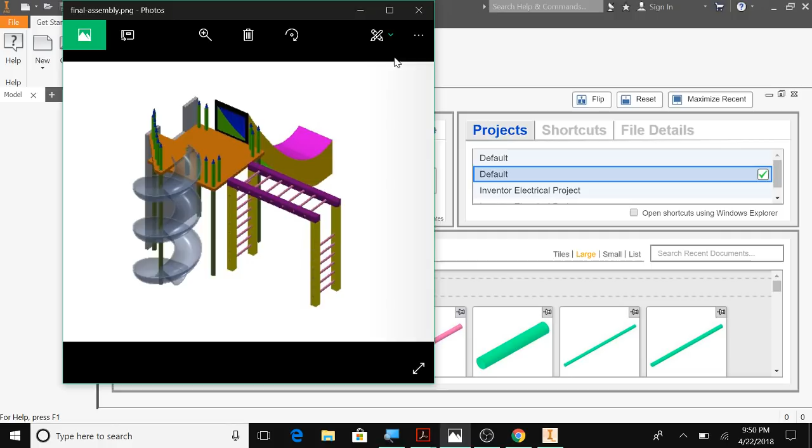So this yellow structure along with the purple structure there, and we are going to start off by creating a part, and we'll go File, Save As. This is going to be in our playground folder under bars this time, and the first one that I'm going to create is the upright monkey ladder. So I'm going to name it that, the upright monkey ladder. Save. Go to Start Sketch, XY plane.

Really important. I just grabbed that using the scroll button on my mouse, pushing it over to here. I use rectangle, and I'm going to start by creating this basic shape, which is 90 inches long and 6 inches wide. Remember, if you want to use the pieces of paper in the packet, they're up by the projector. Otherwise, you are watching this. So I'm going to start at 0, 0, type 6.0, and then 96. Escape.

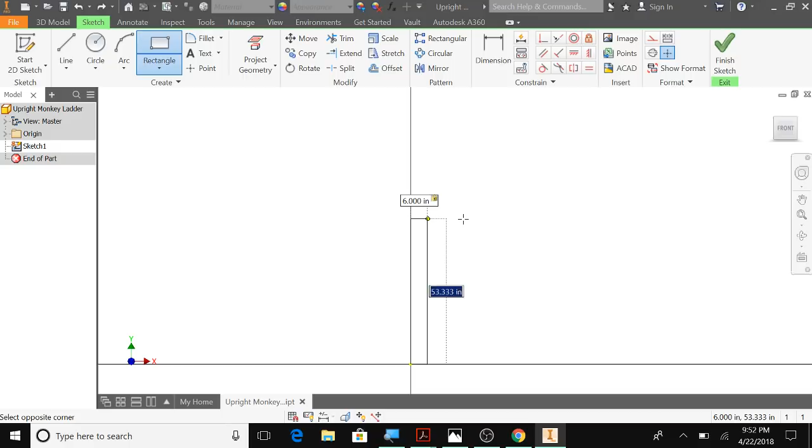Enter. And front. So I guess I failed to say this, but the way that I switched from 6 to 96 is I hit tab on the keyboard. That allows me to switch between each of those measurements. In case you didn't get that, I'll go back really quick and show you: rectangle 0, 0, 6.0, tab on my keyboard gets me to 96.0. And the reason it looked like it was disappearing off my screen is because I was so zoomed in.

That's the default, 1, 1, 1, 1, 1 on the XY coordinate plane. Now we're like close to 100, like what's that, 130, 110, and 10. So a little bit different. That's why it looks different.

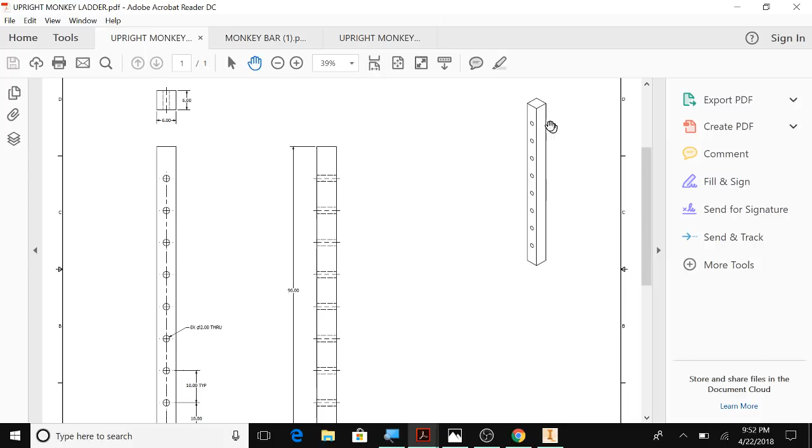So I'm going to hit Finish Sketch. The thickness of this is also 6 because it's 6 by 6. It's referring to that. So I did the width already, and the thickness or the extrusion will be 6. So extrude to 6.0

and home. Now this is why it was important that I created this in quadrant 1. So if you did any other quadrant or didn't create it vertically like I did, this next part's not going to make sense. You should probably go back and change it by editing your sketch. Okay, so make sure it's the way that this is.

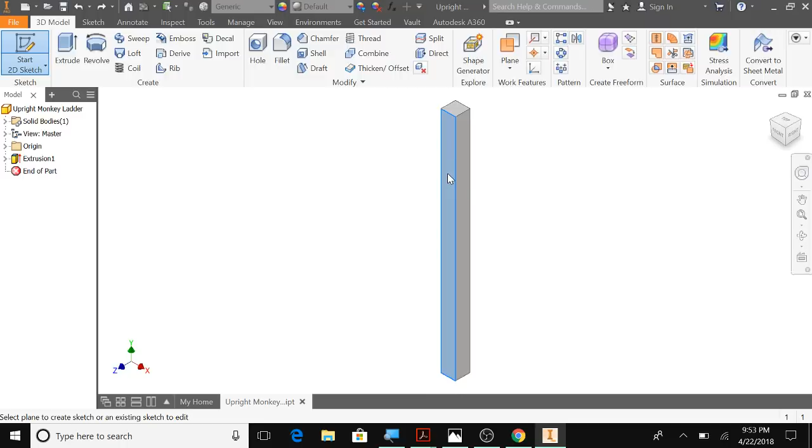Now I'm going to use a new sketch. Nope, that's not what I wanted. New sketch right here on the front, and I'm going to use point because what I'm doing is creating the holes. So these holes are every 10 inches and they're smack in the middle at 3 because that's half of 6.

So I'm going to put my cursor right here at 3, and then I'm going to let go of my mouse and just use my keyboard. So tab, tab, type in 10, and I'm just going to use the Y because it's already at 3. So 20, 30, tab tab 40, tab tab 50, tab tab 60, tab tab 70, tab tab 80, and I believe there's only 4, 5, 6, 7, 8.

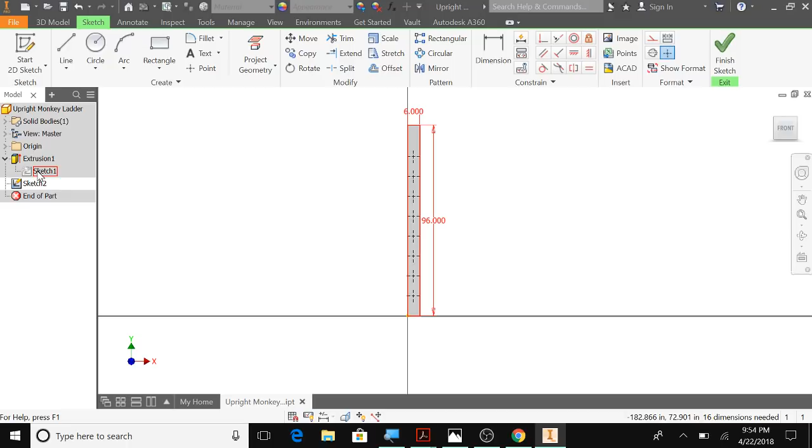I might have made that too long, let me check. I'm going to right click and finish this sketch, then go back to my original sketch. It said it was 90, right? 90. So right click, edit sketch, double click on this dimension line. If that dimension line isn't there, create it yourself. So 90.

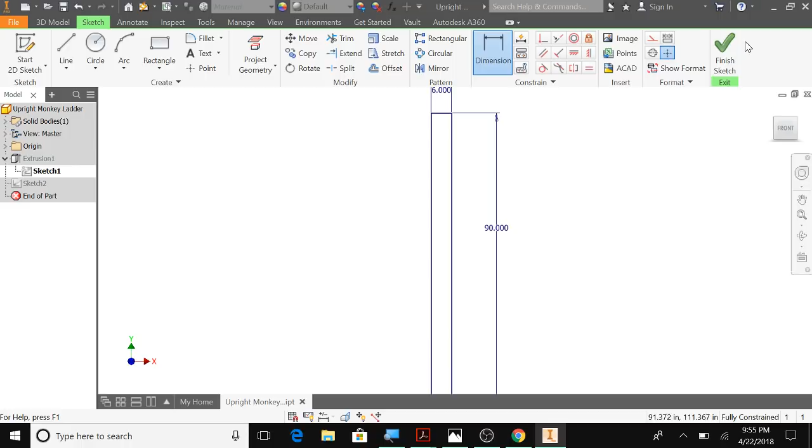Finish sketch, it'll shorten it. That makes a lot more sense. Then I'll create holes, and these need to go through all, with diameter 2.0, because our monkey poles are 2.0 in diameter. I'm going to click save. Just going to double check those go all the way through. Yes, they do.

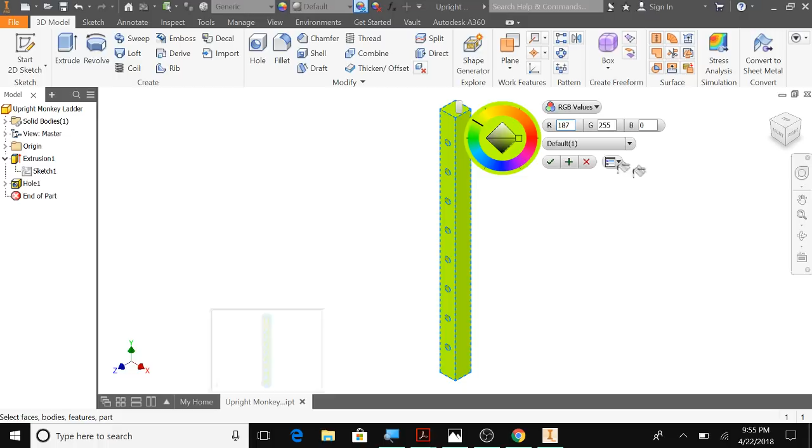And we'll make this similar to that image. We'll make these ones a separate monkey ladder, a little more yellow. Let's try 255, 255. Save. And then let's move on to the next one.

So new part, file, save as. This one's going to be monkey bar. Well, actually, let's stick with upright. Upright monkey bar. So upright monkey bar.

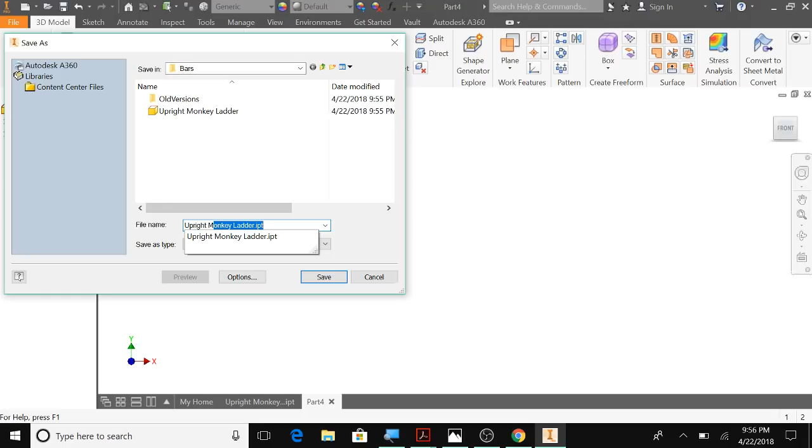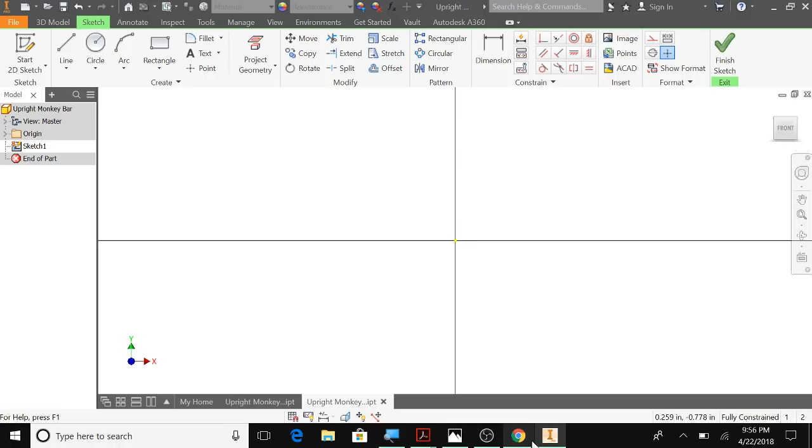Save. And this one has a little gap in it because on the image it's right here, so we're creating this one. I'm going to go back to Autodesk, create this, and this one is also 90 inches long. We'll try to get that right this time. 6 inches wide, so again on my XY plane, 6.0 tab, 90.

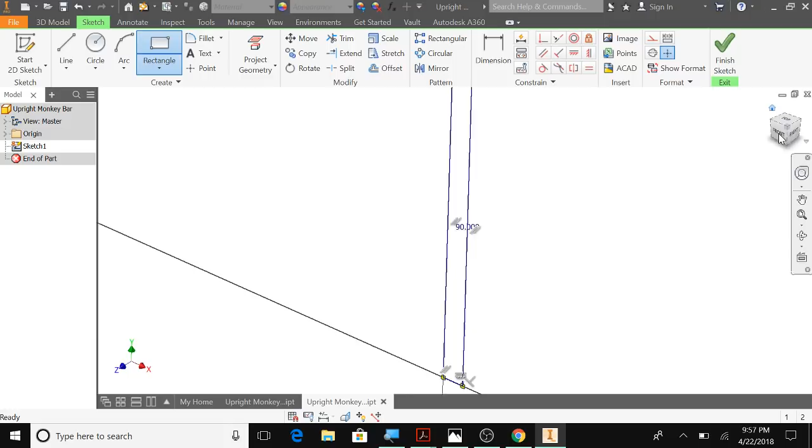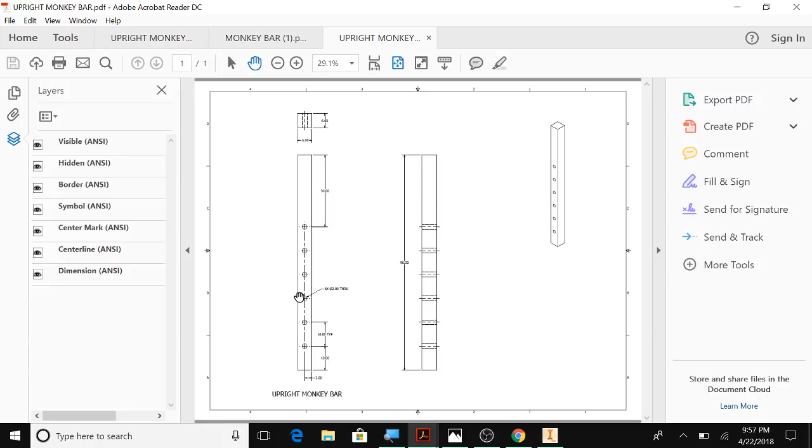Front, escape, and then we can finish. It's the same as the other one, so this one's also going to be extruded 6 inches, and then I believe the holes go up 10, because they have to line up. And there's this 30-inch gap here, so that's only 1, 2, 3, 4, 5, 6 of them.

So I'll start a new sketch on the front. Point, just go there, let go of my mouse. 10, 20, 30, 40, 50 - I think it was only 5. 1, 2, 3, 4, 5, 6. One more, so point 3, and 60.

Also make sure, sometimes you'll notice if you typed the coordinates in incorrectly, maybe you typed 89 on accident - see how it shows up way up there? It'll create a hole there when you finish the sketch, so make sure you right click on these and delete them.

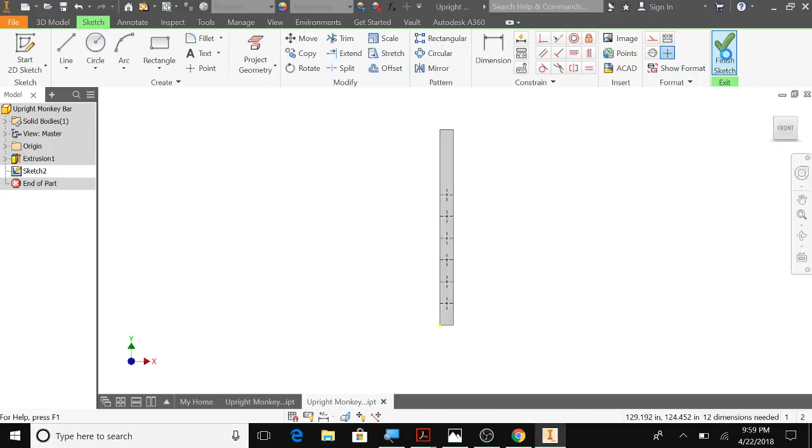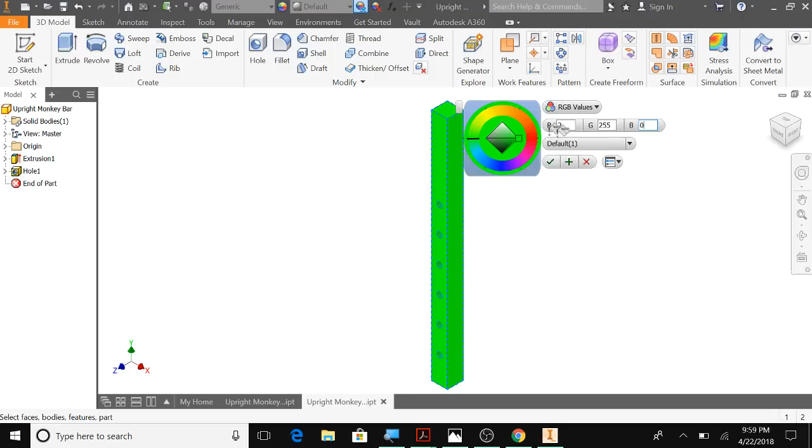So finish, hole, and through all, 2.0, enter, color here. So we'll hit save.

And final one, so new part, and this is monkey bar. Okay, this one's 96 inches long, 6 inches wide, and the holes are every 12 inches, and they're also 2.0 in diameter.

So start new sketch - and don't do that because we didn't save it, so I just did undo, file, new part, file, save as, monkey bar, save, new sketch, rectangle. This one is 6 inches wide, 96 inches long.

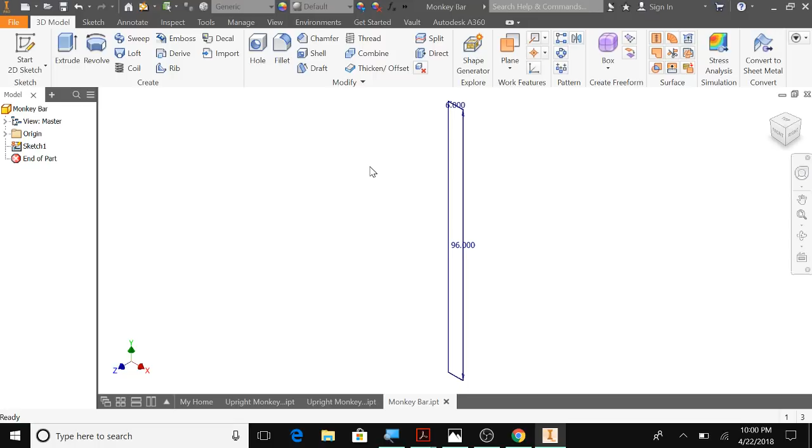48, 60, and it goes all the way up, right? So 1, 2, 3, 4, 7.

So, oops, 3.0, tab, yes, 72, and 96 - nope.

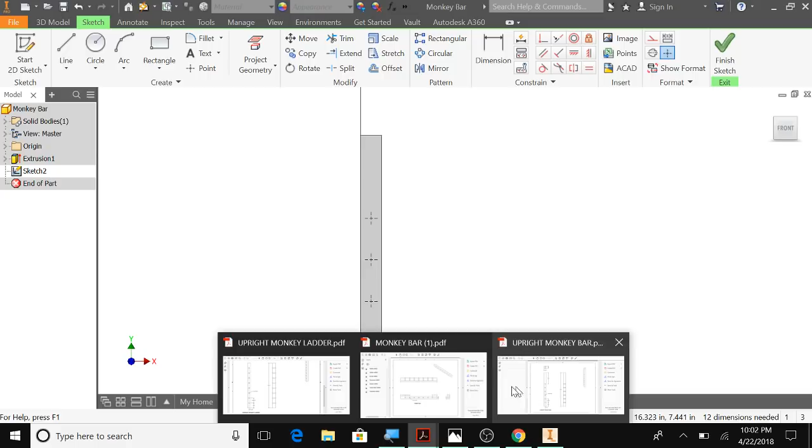Let's get rid of that one. 1, 2, 3, 4, 5, 6. And there's 7, I believe. 1, 2, 3, 4, 5, 6, 7. Seven times 12 is 84. So, okay.

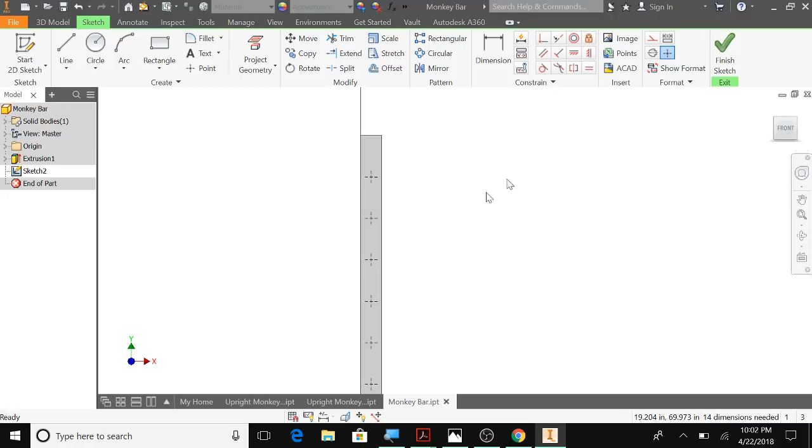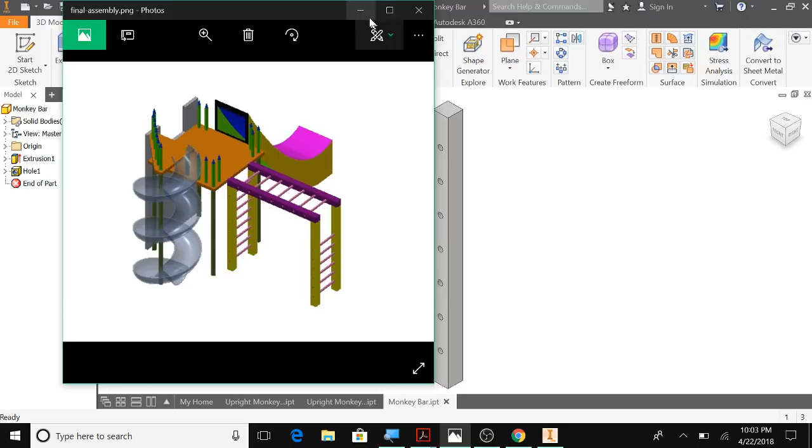And we will put holes 2.0 through all. And this one we can make a different color - I think on here it's like a purplish color, so I'm looking at this right here. So we can make it kind of a purple. Sure. Save.

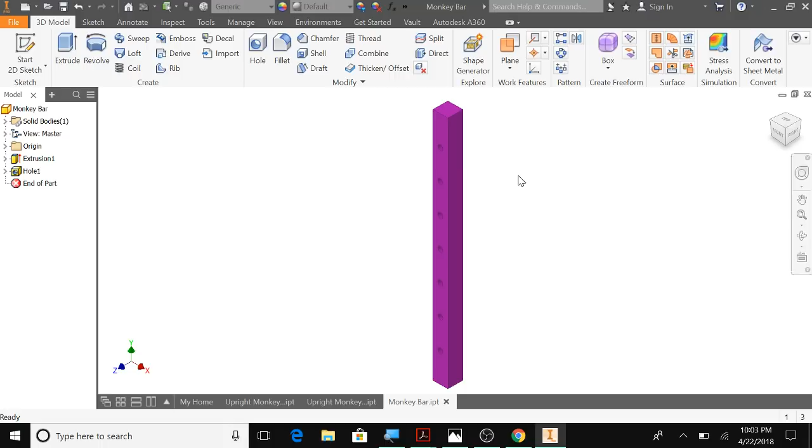Alright, boom, done with all of our bars here, so that apparatus is done.